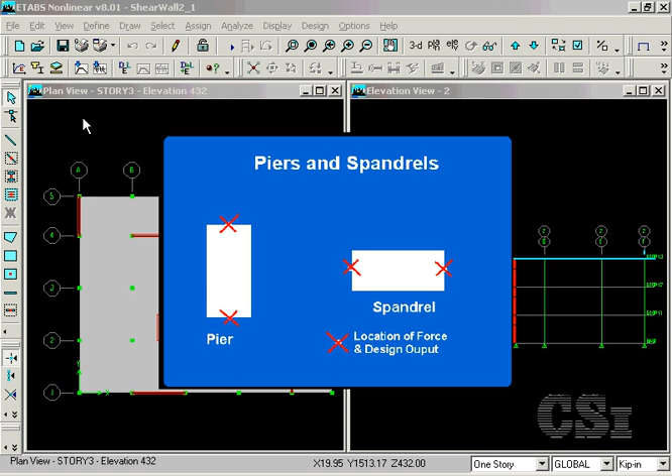Pier elements will report the forces and perform the design at the top and bottom of each pier for each story. Spandrels, on the other hand, output the forces and the design at the left and right ends of the elements, and not the top and bottom.

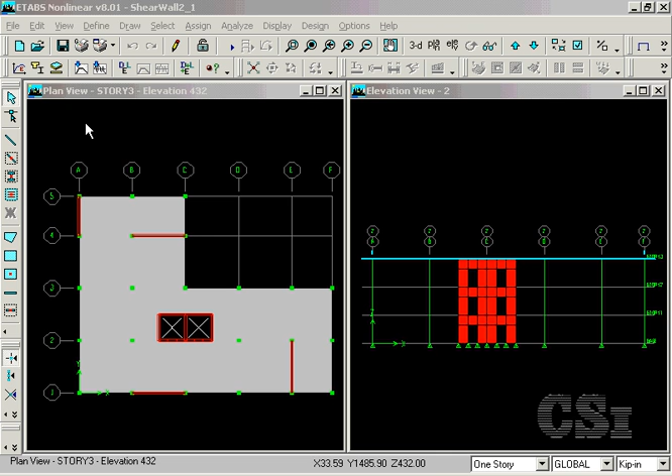Elements may be assigned both a pier and a spandrel label, but no element may have more than one of each. There are many ways to arrange the labels, and we suggest you review the Concrete Shear Wall Design Manual for more details. Start by zooming in on the elevator core.

The portion of the core wall that does not have any openings, the E-shaped wall, will be assigned one pier label so that the forces and design will be reported for the entire section. Check that the similar stories is set, and select the 5 wall sections that make up the E.

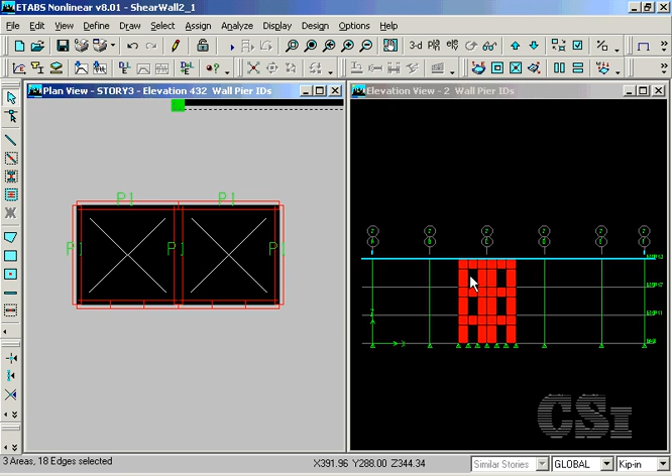Go to the Assign Shell Area Pier Label command and enter P1 for a new name. Next, switch the active view to the elevation on the right. For this wall, we will define a total of 3 piers. Start by selecting the leftmost pier elements and assign a pier label of P2.

Select the center elements and assign P3. And assign P4 to the pier elements on the right.

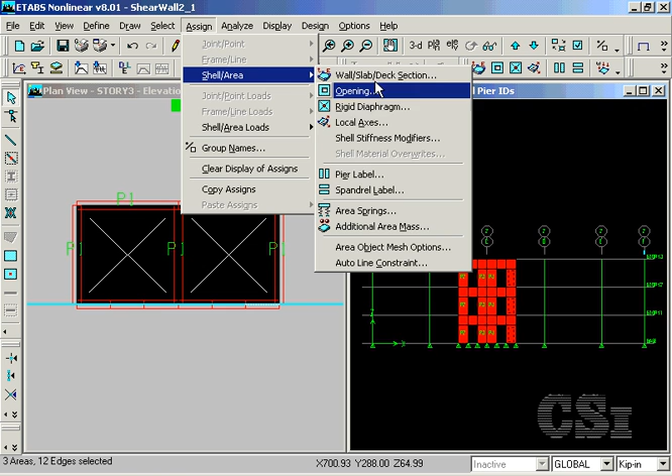Now, using the intersecting select option, select the 3 spandrels on the left side and go to the Assign Shell Area Spandrel Label command and enter S1.

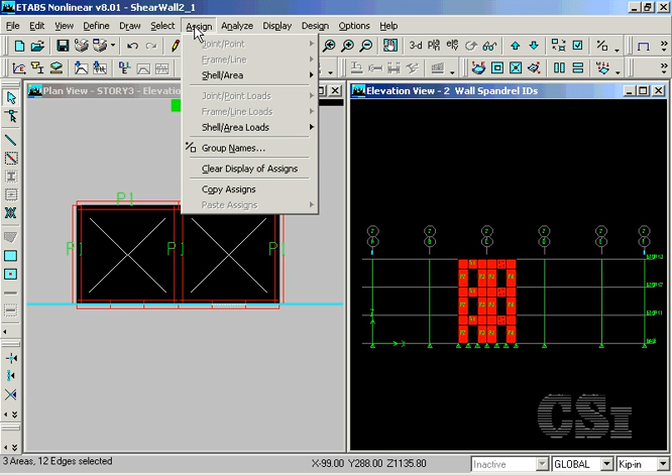Do the same procedure for the spandrels on the right, labeling them S2. Make sure to click on the new name first. Now that the requested piers and spandrels have been labeled, run the analysis.

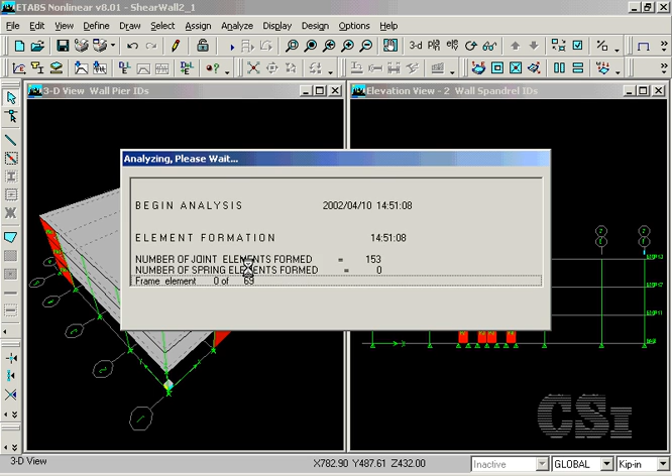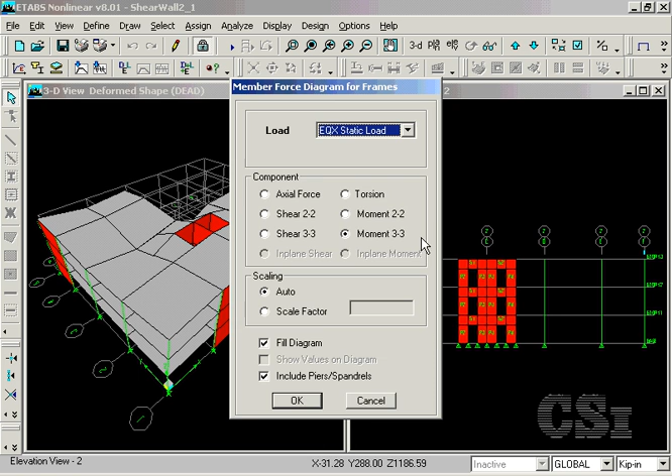To view force output, select the Display Show Member Forces Stress Diagram Frame Pier Spandrel Forces command. To view the forces associated with the E-wall, change the view to a plan and select the walls.

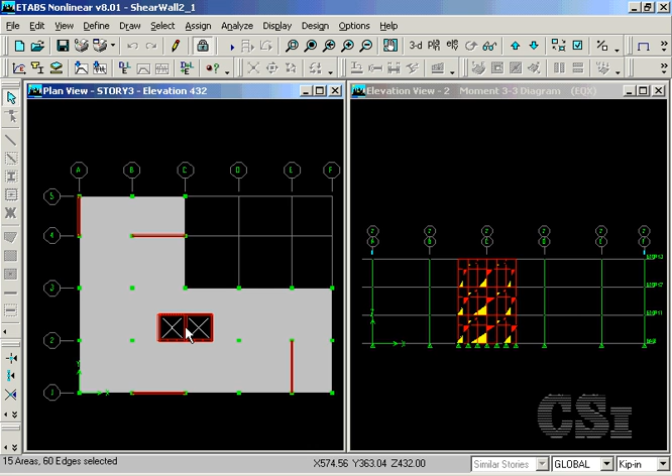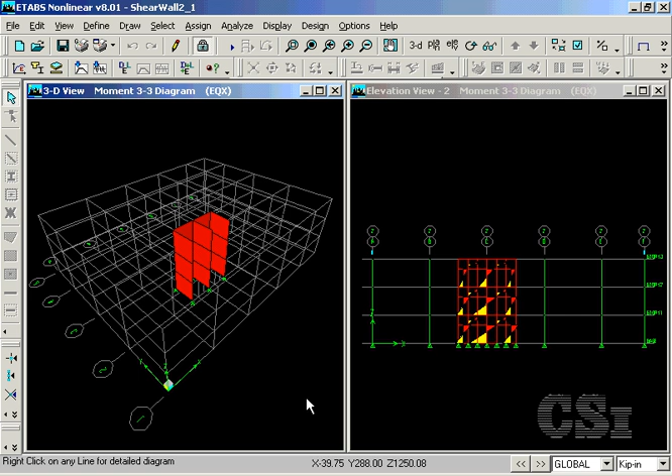Go to the View Show Selection Only command, change to a 3D view, and go to the Display Forces command. Note that a single moment diagram is displayed for the entire wall assemblage. Now we are ready to start design.

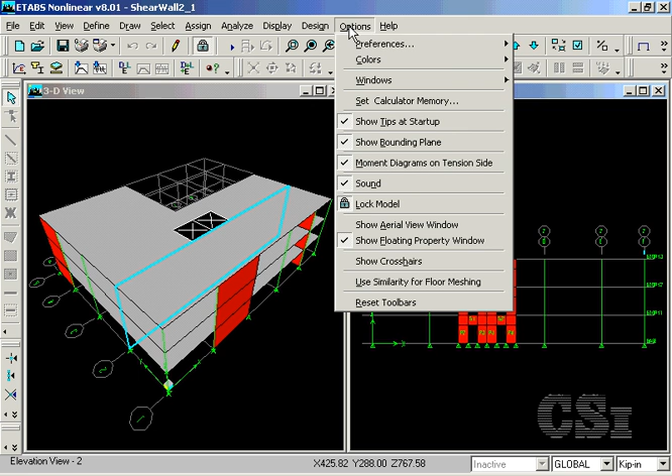Start by clicking on Options, Preferences, Shear Wall Design to check the default design choices. Check that the design code selected is UBC 97. You may review or overwrite the design option for any pier by selecting a pier and going to Design, Shear Wall Design, View, Revise, Pier Overwrites.

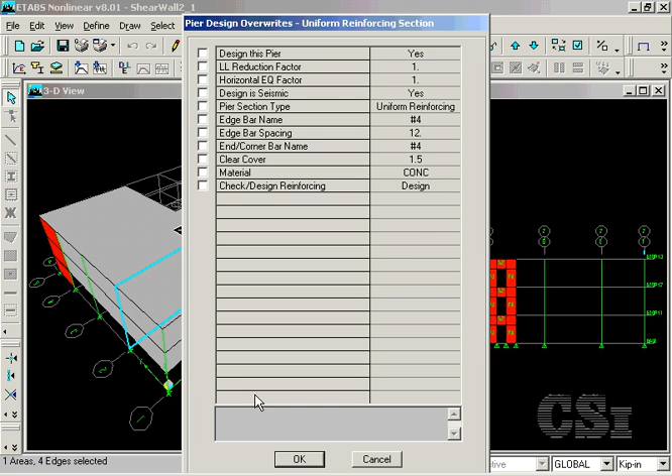Note that uniform reinforcing is selected, which we generally recommend, and that design is selected rather than check. Next, click on the Design, Shear Wall Design, Start Design command.

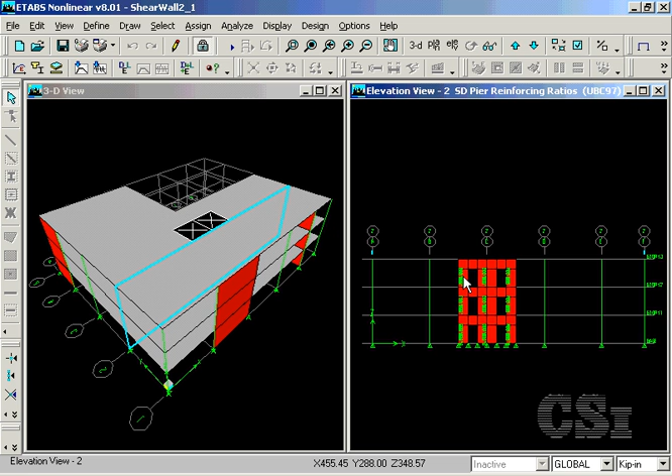Once the design is completed, design results are displayed on the model. A right-click on one of the members will bring up the Interactive Design Mode form, where changes may be made and the design results will be displayed immediately. This concludes this tutorial.